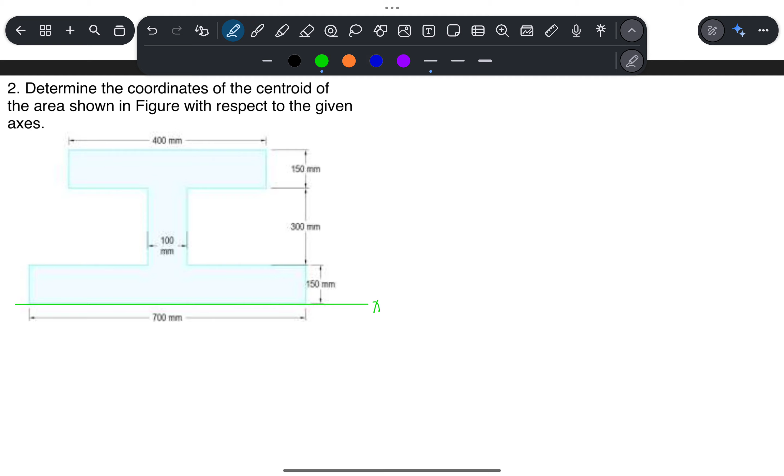Wala naman binigay na axis. Pwedeng dito na tayo sa bottom part. So, this is x-axis. Tapos yung y-axis, symmetrical naman yan, di ba? So, kapag symmetrical, alam natin nasa gitna lang yan. Okay? Tapos, gagamit tayo dito ng differential strip.

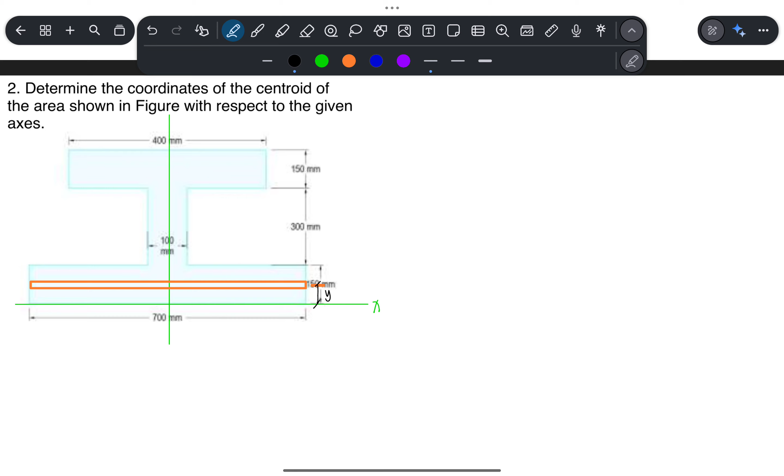Sir, paano yung differential strip na sinasabi? So, una, itong horizontal strip. Tapos, ang centroid niyan ay y. So, ilagay mo to y. Nagbabago-bago yung strip. So, sir, paano to? Ito yung dy natin. Tapos, constant naman yung base niya, since rectangular lang siya. So, that is, ang total area niyan is equal to the integral of strip.

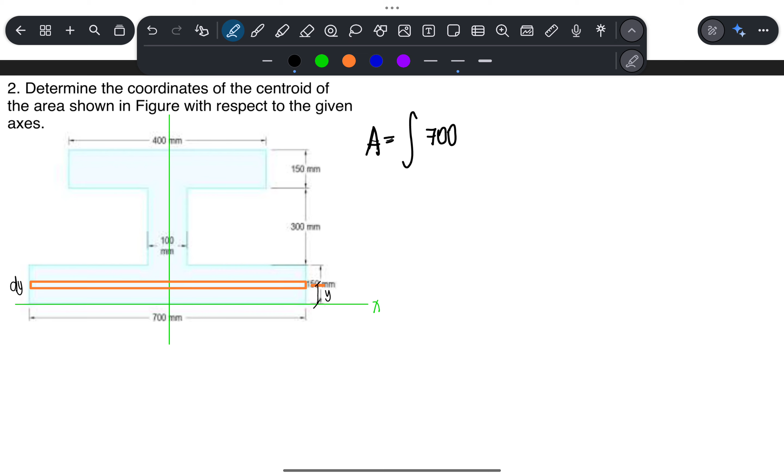Ano yung strip natin dyan? Base. Ang base natin is 700. Ano yung dy natin? Dy times its area muna. Ang limits niyan, from saan nag-travel itong strip na ito? From 0 to 150.

Okay? Plus, ibang strip naman, lilipat na siya dito. Yung strip mo, nandito na. That is dy. Ano na yung base natin dyan? 100 dy. Ano na yung limits mo? This is from, ito na yung ta-travel, 150 to paangat dito, 400... 150 to 450. Tama? Parang ginagawa natin siyang Cartesian plane. So, this is 150 and then yung coordinate nito is 450.

Plus, nabago ulit yung strip natin. Nandito na siya. So, yung strip natin dyan ay 400 dy. So, ito yung dy. 400 dy. Ang limits niyan ay from 450 up to 600. So, lalagay mo yan, total area.

Sabi ni sir, base times height lang yan, sir. Okay, tama lang. Base times height lang. Actually, yun lang naman talaga yan. Pero, ano lang. Hindi kasi pagka ganito, dire-diretso yan. Hanggang moment of inertia, integral lang.

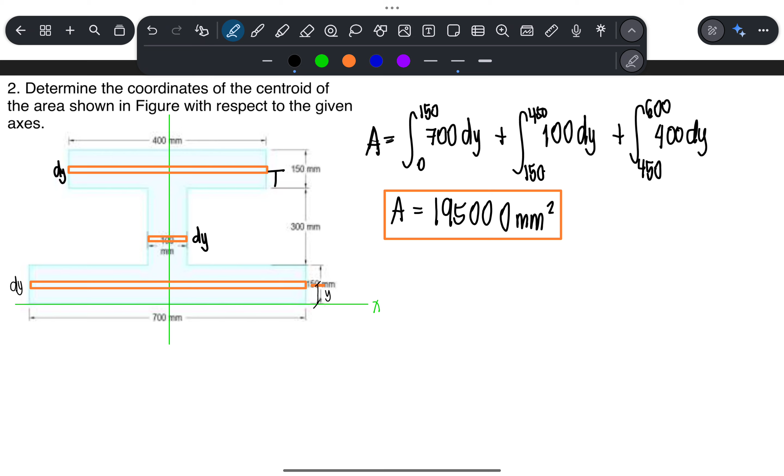Yan lang din naman. Sir, paano naman kapag centroid? Diba ang sabi natin sa centroid, the total area multiplied by the bar y is equal to the integral of ito naman kung natin ng centroid. So that is, y din naman siya dito from the x. So magiging

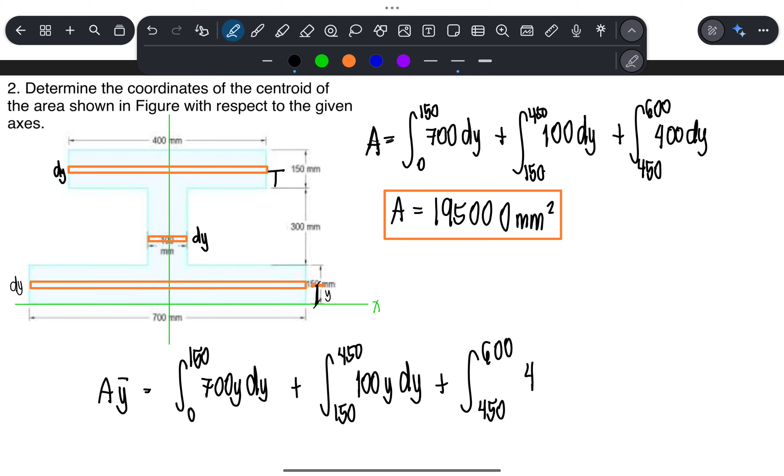700y dy from 0 to 150, plus the integral of 100y dy, lalagyan nyo lang siya ng y, from 150 to 450, plus integral of 450 to 600, 400y dy. So, yan na yun. Tapos, i-divide nyo lang to ng total area, no? That is 195,000 to solve for bar y.

Alpha x lalagay nyo, ha? Divided by 195. The answer is 248.077 millimeters.

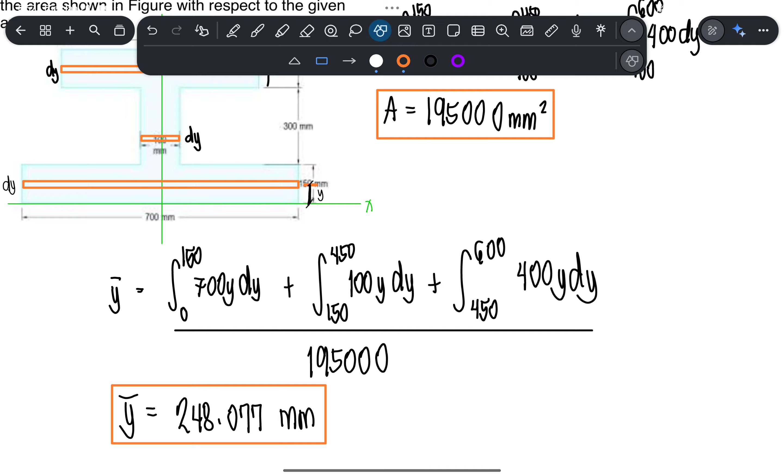Yan, nadating yung charger. Ayan.

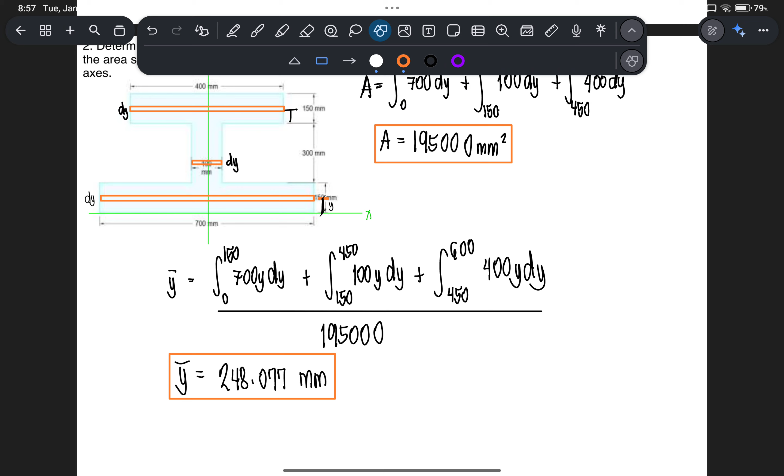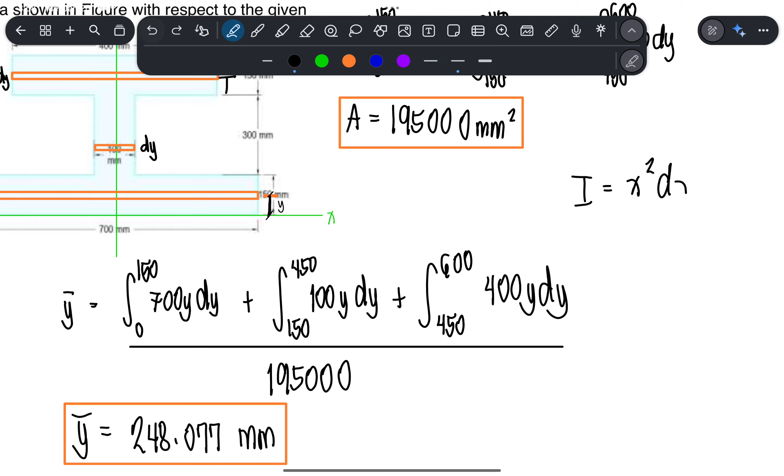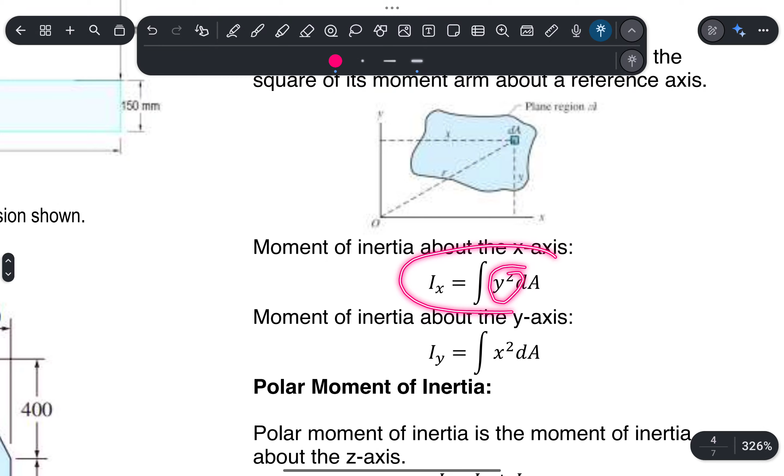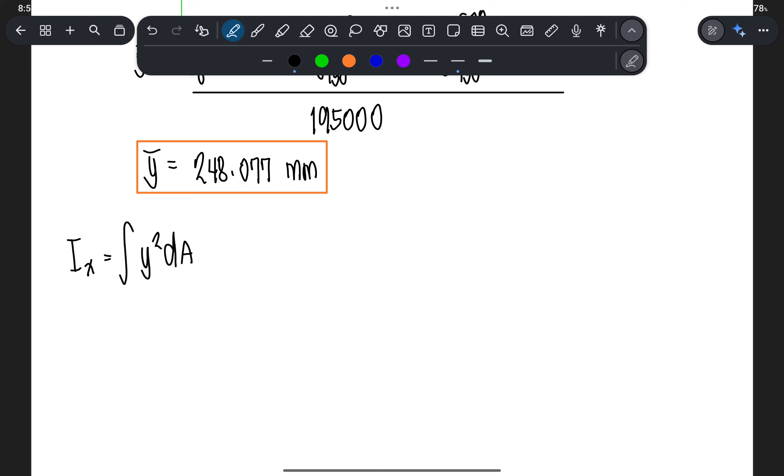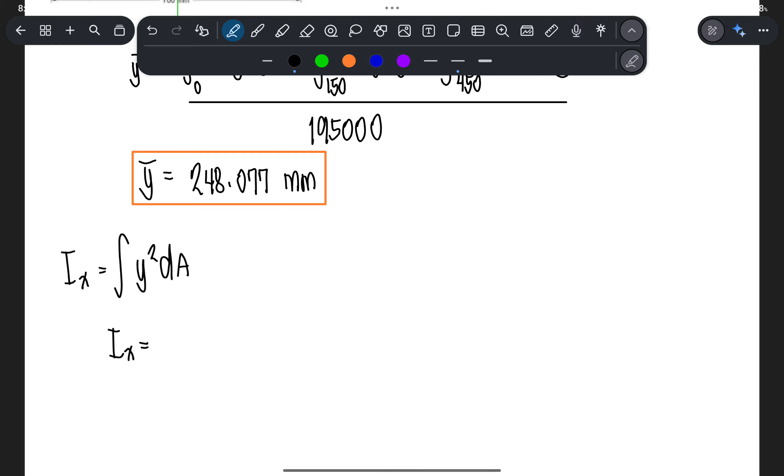So, sir, paano pagka inertia about x-axis? That is y squared dA. So, integrate nyo lang, isa-isa lang uli yun. So, magiging ix na natin is equal to, di ba ang formula ng ix is bh cube over 3 kapag rectangle na. Mamaya, didiscuss na. Pero dire-diretso lang natin. So, that is the integral of, ano yung dA natin?

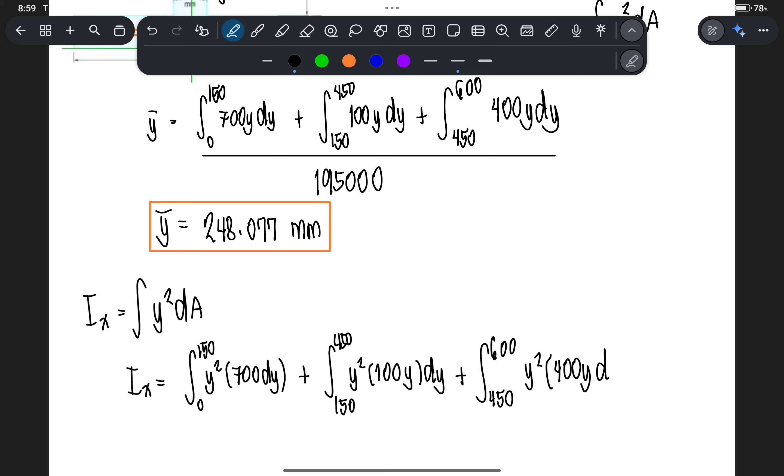700 dy, no? So, we have y squared multiplied by 700 dy from 0 to 150, plus the integral of y squared by 100y dy from 150 to 450, plus the integral of 450 to 600, y squared 400y dy. Ay, sumobra, tama, sobra yung 100y ko. 400 dy.

So, magkano si ix? So, ito na yung ix nyo. Dagdagan nyo lang ng squared yung mga y. So, that is 20.3625 times 10 raised to 9. Ito moment of inertia about x-axis.

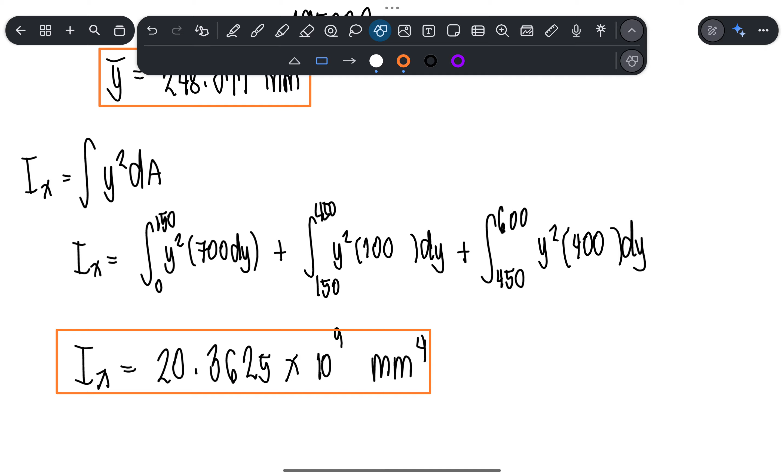Pero ang mga ginagamit natin, di ba, kapag I-beam is si I NA, no? Yung moment of inertia about the y-axis. Ay, neutral axis rather. Pero, ganun na lang siya pagka inertia about the y-axis. Kukunin nyo yung, from the neutral axis.

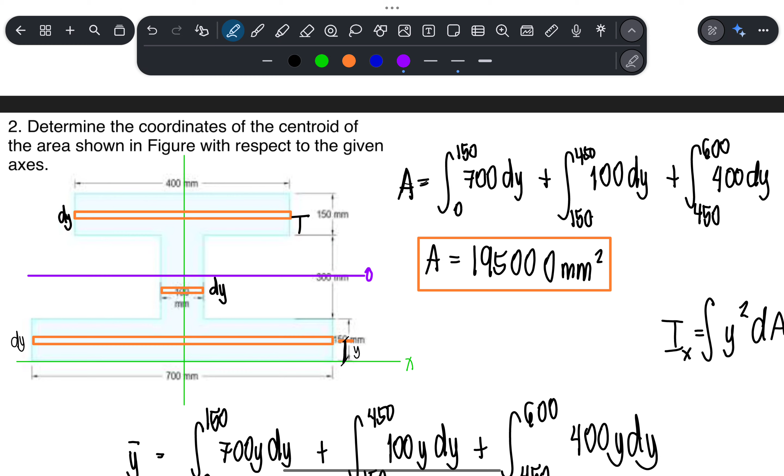So, susulat nyo yung neutral axis. Tapos, ita-travel nyo pa rin siya dito. Kaso, mababago na yung limits niya. Kasi ito na yung magiging x-axis nyo. Yan na yung parang inertia nyo about that axis eh. Mamaya, mababago na yung limits.

So, kung ang centroid natin dito ay, di ba yung centroid dito, 248.077. Mababago na yung limits nyo dyan. Ang magiging limits nyo na dyan is, una, di ba kanina dito tayo nag-reference? Ito yung 0 to 150. Ngayon, magiging negative 248.077, na mababago na yan, magiging negative kasi pababa, no?

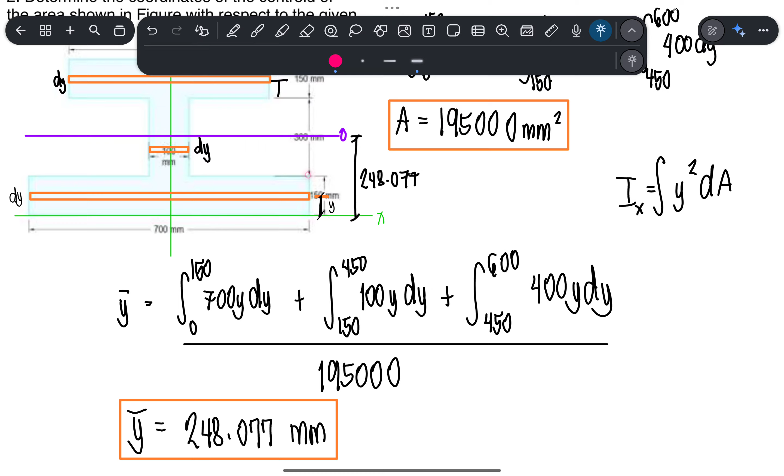Tapos, from, pwede natin siyang baguhin. So, magiging limits na niyan to solve for the ina, or the moment of inertia about the neutral axis. So, magiging neutral axis na to. Ang magiging limits nyo ay papalitan nyo na siya. Magiging negative, yung centroid to dapat eh. Negative... ay, lumipad.

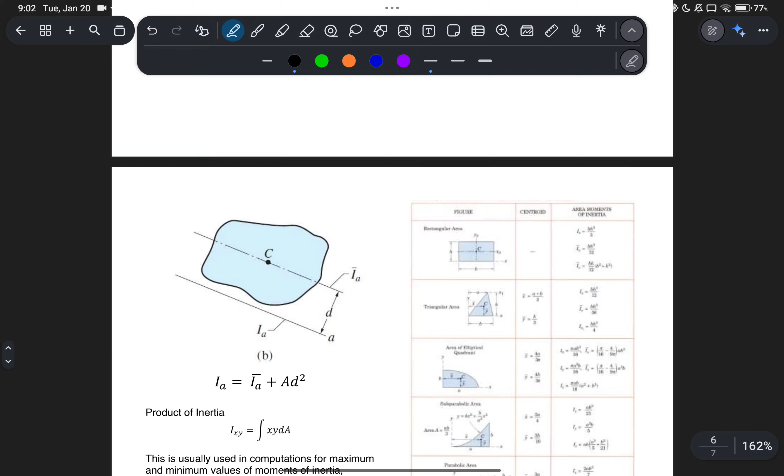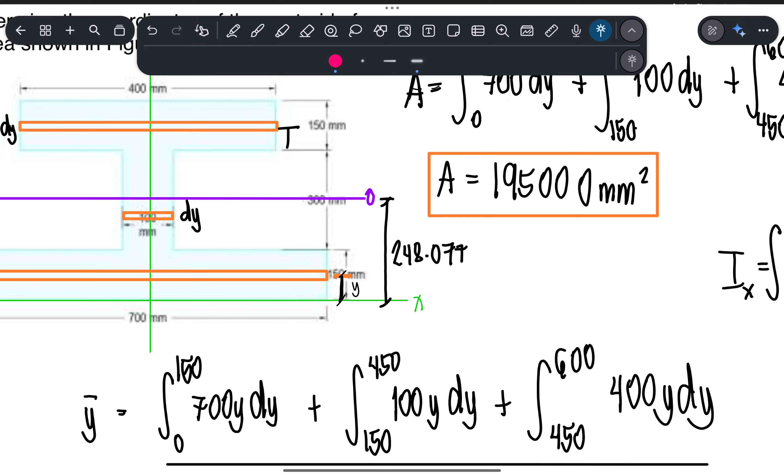248.077. And then, yung upper limit natin is, ito, 150 minus 248.077 minus 150. So, that is negative 98.077.

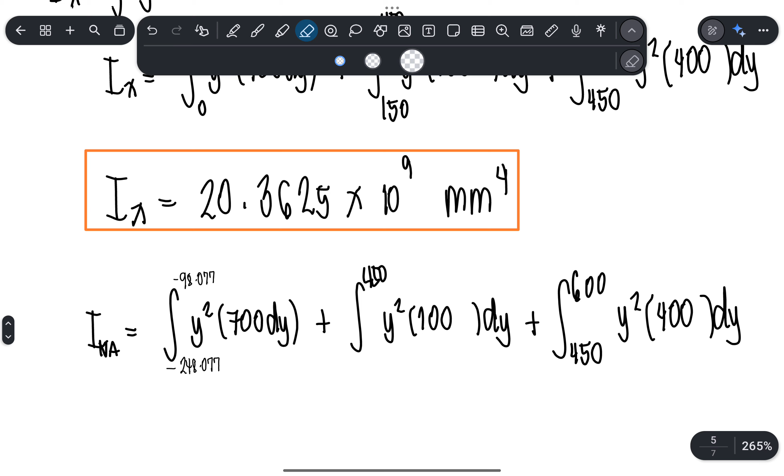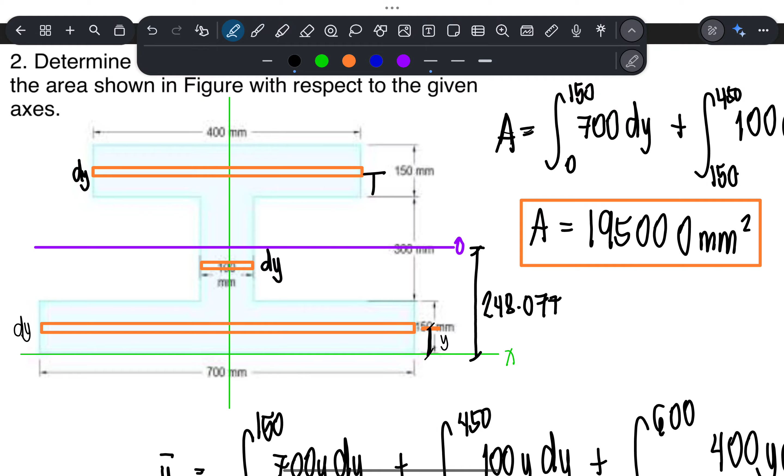Mamaya tatry naman natin to sa method na iba. So, ito naman, magiging limits na nito ay from negative 98.077 up to this point. No? So, that is, ano kaya yung point na to? That is equal to 450 minus 248. So, ibig sabihin, itong point na to magiging 201.923. Okay?

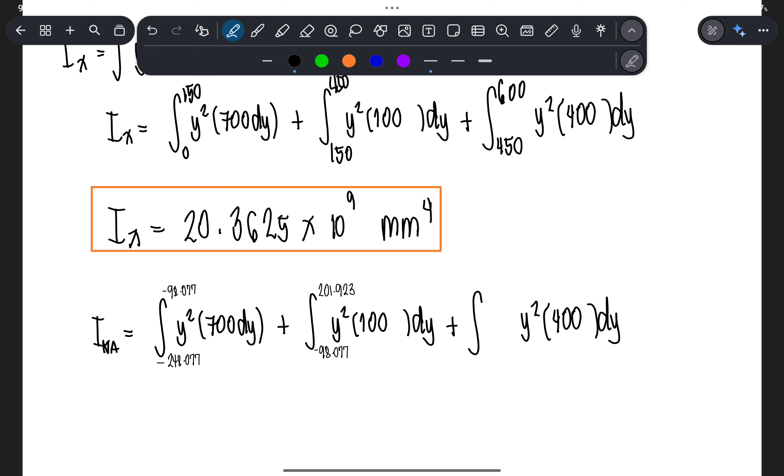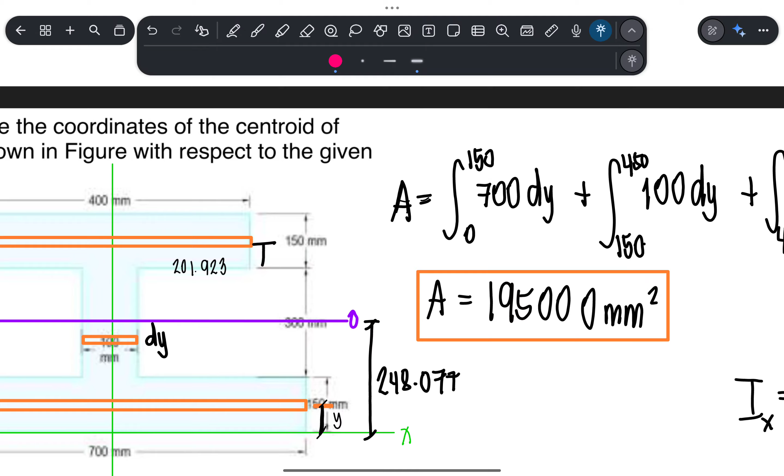201.923, upper limit. Ang lower limit niya is negative 98.077. And then, dito naman, papalitan mo lang yung limits niya, magiging 201.923 up to, ano naman to, yung coordinate na to, that is 600 minus, dagdagan mo lang, 351. So, magiging 351.923. So, ito na yung moment of inertia about the

neutral axis. Ayan, palitan nyo lang ng limits. Para mas maganda i-type mo na lang uli. 248.077, 077 ba? Tama. Negative 98.077. Plus negative 98.077, and then 201.923. Lower limit 201.923, 351.923.

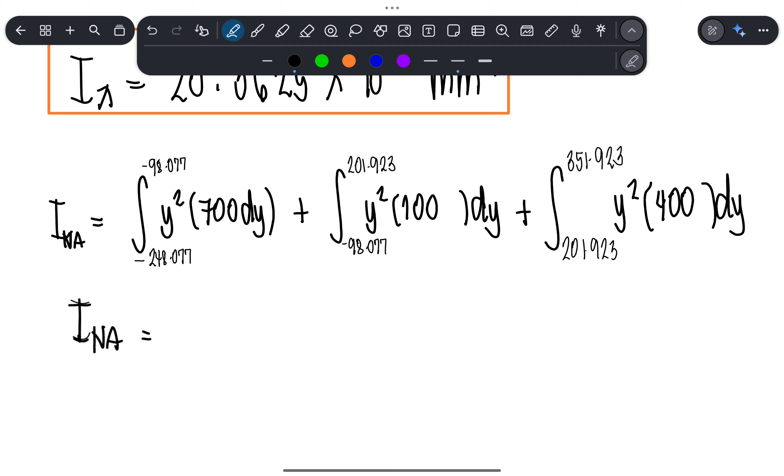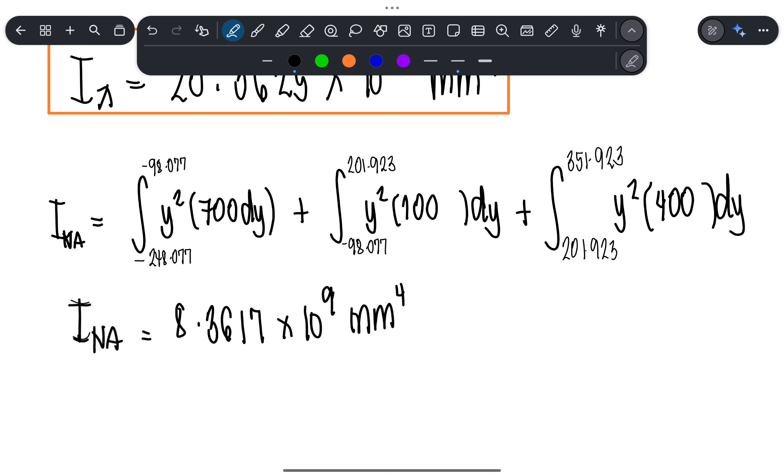So the answer is 8.3617 times 10 raised to 9, millimeter to the 4th. Yan na yung inertia.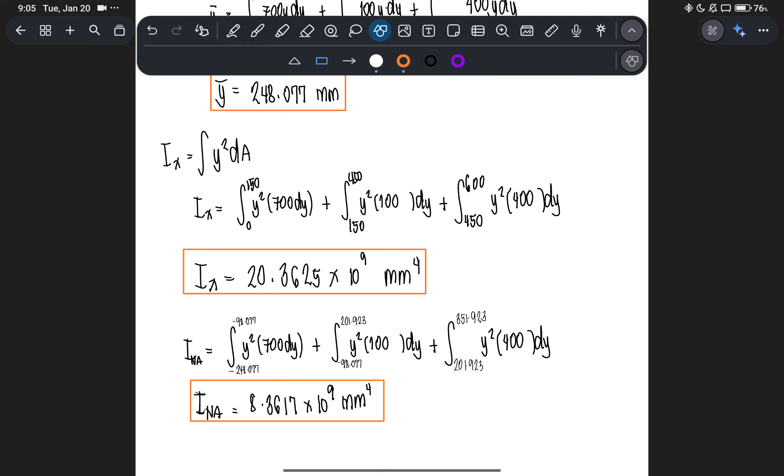So, basta calculus. Pero, ito yung ibang tinuturo to sa ano eh, natutunan ko din to sa ibang review center. Ganito yung approach nila. Tapos, wala lang, natuwa lang ako na nagka-calculus. Yung calculus medyo master nyo, kasi sa hydraulics, parang yung mga surface, hydrostatic force, calculus lang yung ginagamit nila doon. Halos yung iba, parang differential area lang din, depende kahit anong shape na yung mangyari, kung rectangular siya, triangular, no?